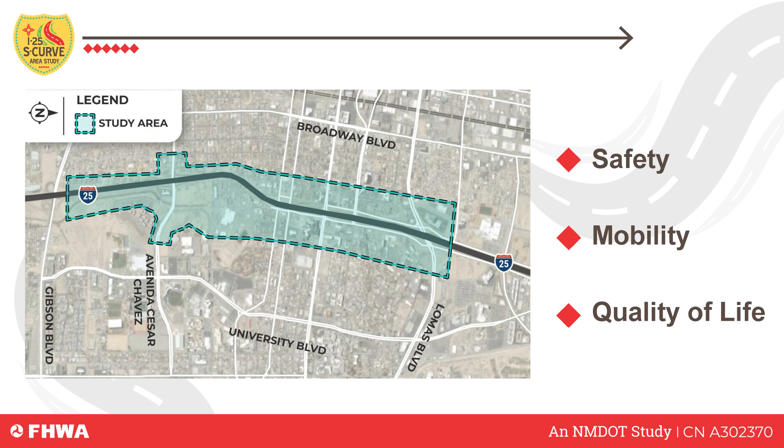We're going to start by going over the welcome packet that you received when you first arrived today. Then the team will review the no-build and build alternatives. We'll go over the level 2B screening and the alternatives advancing. Then we'll talk through how to leave a public comment and open it up to questions.

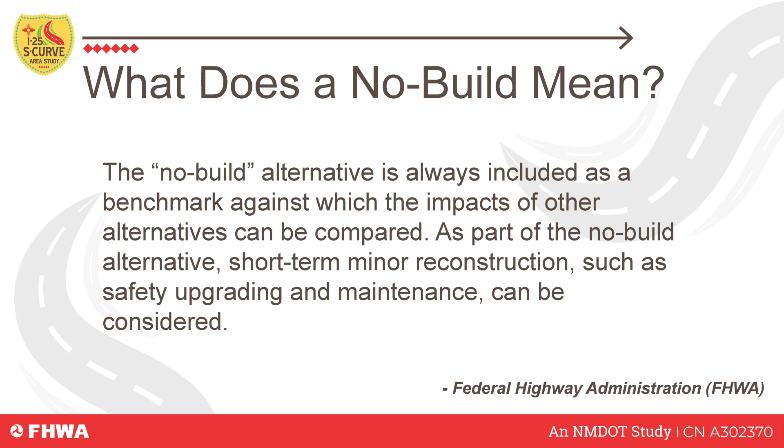So let's try to define what no build ultimately means, because no build is not exactly completely nothing. But what it does not include is new facilities and new configurations. It doesn't include new biking and walking facilities, and it wouldn't include any noise abatement features like noise walls.

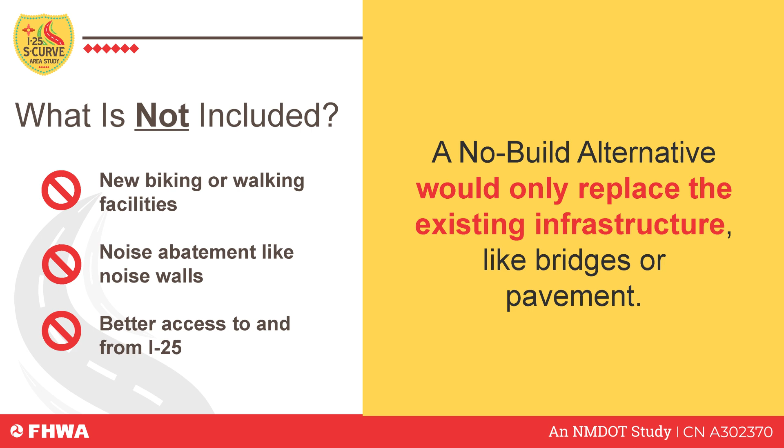And it would not include any changes or improvement to the access to and from the freeway. The no-build alternative would only replace existing infrastructure as it would need replacing, such as the bridges and pavement as it gets aged and needs replacement.

No-build would not necessarily mean there would not be any construction on the freeway. It would require ongoing maintenance, of course. And as the aging infrastructure needs replacement, many of the bridges are nearing that point, so they would need to be replaced, but in similar configurations as today. Construction impacts would be present as those replacements occur. So it isn't like there's no construction, ongoing maintenance, or improvements needed to keep the facilities working.

As with any replacement of existing bridges or infrastructure, or any of the build alternatives, the department does not have any funding identified for this at this time. So the timing of any of those replacements, with a no build or any of the other alternatives, is not known.

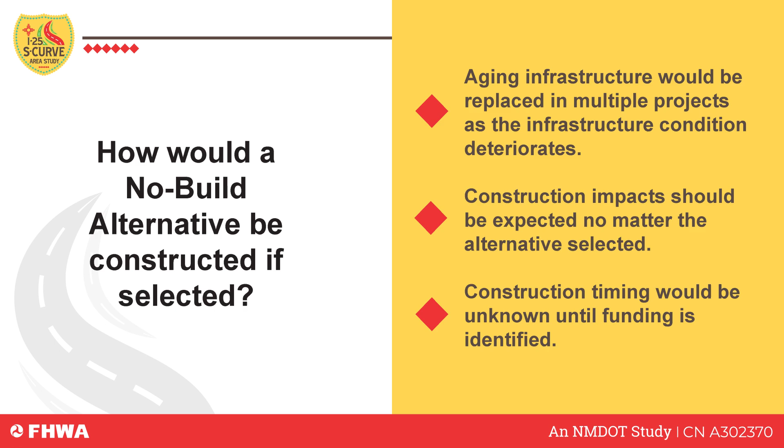Based on a lot of the public input, we did a substantial analysis on the no build and what that would mean over time. If nothing is done to change the configuration of the freeway and the ramps, we do expect to see substantial increases in travel times to and from destinations.

We expect to see substantial increases in commute times along I-25, and a substantial increase in crashes as a consequence of the no build. As that congestion increases on the freeway, we'd also expect the local city road network to be affected, as motorists find alternative routes around the congestion, so we'd see congestion increasing on local streets as well.

This next slide is very similar to a number of boards out in this corner of the lobby, just outside the doors. This is just one representative example. We analyzed travel times using our traffic operations model, and projected traffic out to year 2050 using the MRCOG's travel demand model, then analyzed how that would operate.

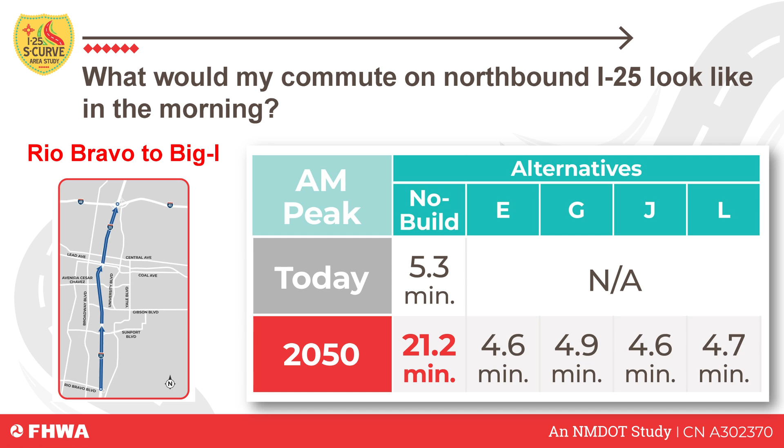Then we also analyzed safety. We performed a predictive safety analysis following a methodology driven by the American Association of State Highway and Transportation Officials, which provides a methodology for predicting the number of crashes. Today, typically what we're seeing through the study area is about 173 crashes a year.

If nothing is done, no improvements are made to the facilities, we would expect that to increase to about 296 crashes per year for the same section. So crashes would increase. This next slide shows what the different levels of improvement would be under each of the build alternatives we analyzed.

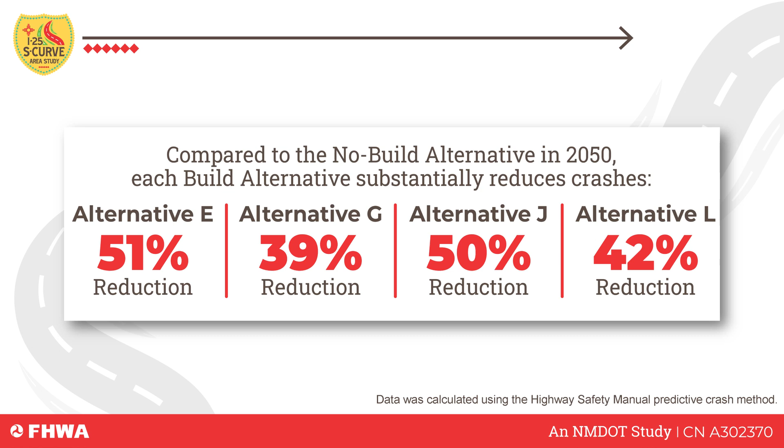We see those range—in the case of alternative E, a 51% reduction from the no build in year 2050. Alternative G, about a 39% reduction in crashes in the year 2050. Alternative J, about a 50% reduction, and alternative L, about a 42% reduction in crashes at that same year. So through that, we concluded that the no build does not meet the purpose and need as we've developed and defined it.

If you participated in previous meetings, we spent quite a lot of time presenting what we saw as the purpose and need for improvements—namely improving safety by reducing crashes, and improving traffic operations to meet the growing and future travel demand. From that analysis and the results presented out in the lobby, we determined that the no build really does not meet that purpose and need.

So the build alternatives, I'm going to spend a bit of time describing these, and it is very hard to describe these and have you see them from the screen. There are boards just right outside that door going along the back of this wall that show each of the alternatives that we evaluated and analyzed. They are E, G, J, and L. Of those four alternatives, we're proposing to forward only two that are much larger scale, laid out horizontal on the tables out there. They're a lot easier to see, so I invite you to do that because it's going to be a little bit hard to describe from here.

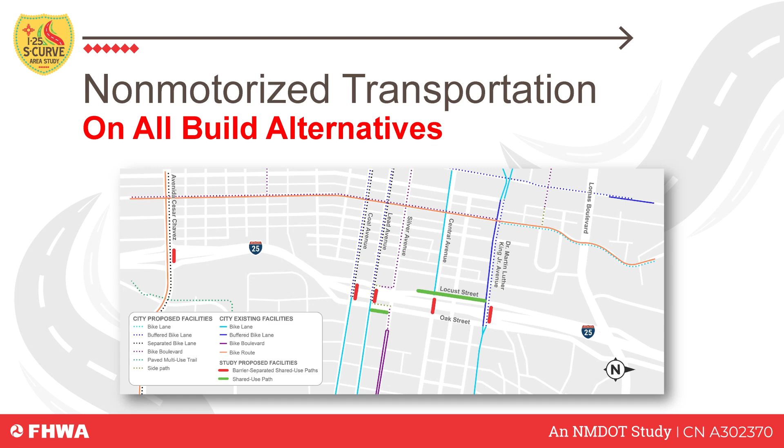In addition, there is a real need for improvement. We found that the safety experience for both bicyclists and pedestrians shows a higher than typical bicycle crash experience, and also a higher vehicle-pedestrian crash experience than is seen normally on similar facilities. Not that that's ever a good thing, but there's an even higher level of that along each one of these cross streets at the intersections with the frontage roads. So there is a need there.

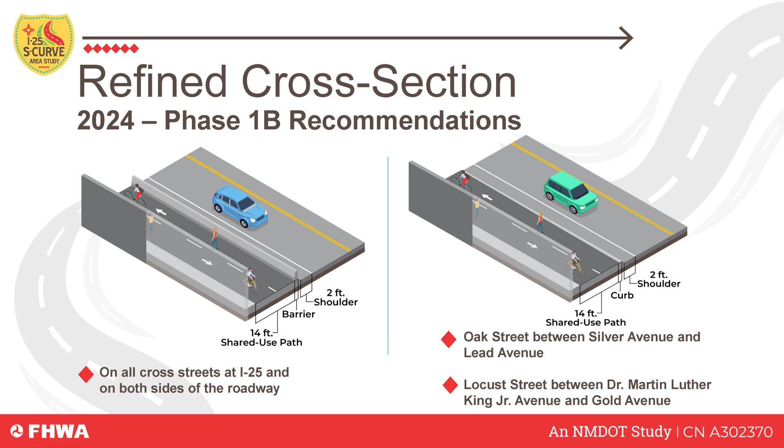At each one of these cross streets, in these alternatives, we're proposing to include a separated pathway that combines both pedestrians and bicyclists on each side of the road, 14 feet wide, separated by a concrete wall barrier from the vehicular traffic on each side of each cross street. That would be carried through the corridor and then connected, matching the cross-sectional elements contained in the city's non-motorized transportation plan, matching those back in once we get away from the freeway. So that's included with each of the build alternatives: a 14-foot wide trail on either side. A lot of that has come from our interaction over the last few years with advocacy groups in the bicycle and trail community in Albuquerque.

Then there are going to be a number of details. We're proposing to include a number of ways for how those sections would transition back to those adopted planned facilities along those roadways. That's going to be a combination of crosswalks and what's called bike boxes—if you're not familiar with them, they're a special treatment where bicycles get an isolated place away from the traffic to make their decisions and crossings—and widened paths through the intersections. So each one of the build alternatives contains those improvements.

For the freeway infrastructure, the ramps and the mainline freeway, there were two options that we forwarded and combined into these alternatives. One is a westerly shift, which shifts the freeway section to the west in the Lead and Coal area, and then an easterly shift, which shifts the freeway to the east, near the Albuquerque Public Schools property where the mural is located.

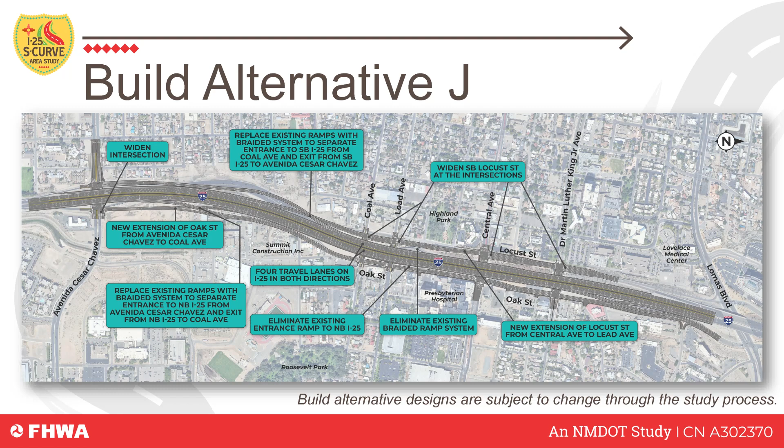The other option is similar to what was forwarded in the last planning study from 2016. It includes a simplification of the ramps, primarily a closure and removal of the ramp southbound from Coal, so you would not be able to access southbound I-25 from Coal. If you were going to access southbound I-25, you would do it through the ramp that exists in the current configuration south of Central. Other than that, it maintains all the other ramps.

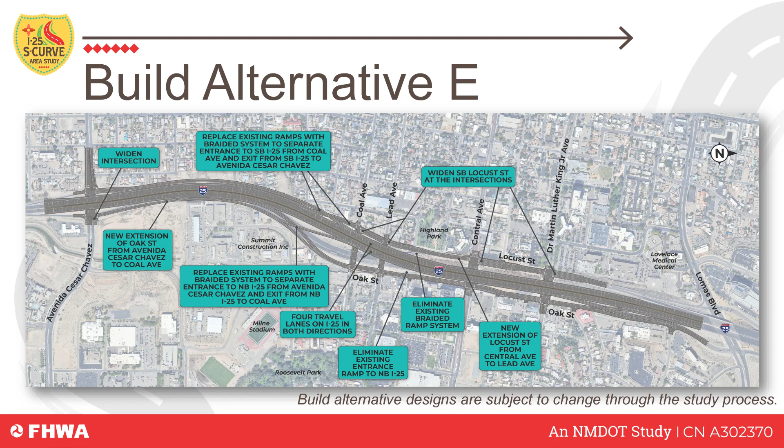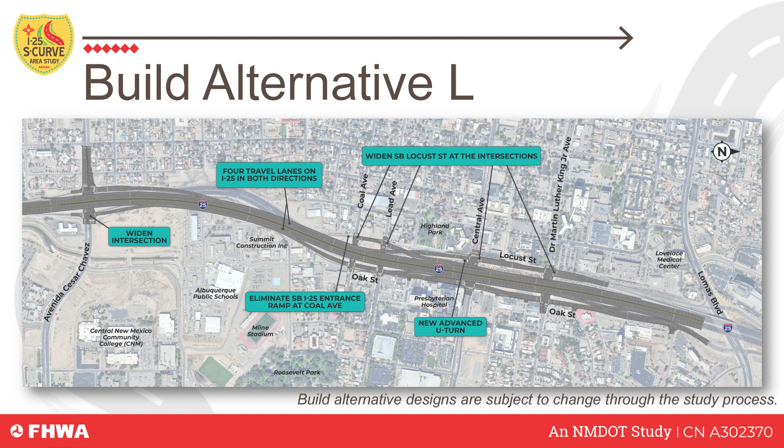It does include the addition of an advanced U-turn, what most people think of as a Texas turnaround, at Central, so you can access that southbound on-ramp south of Central. So those are four permutations: a westerly shift with one configuration and with the other ramp configuration, then an easterly shift with one configuration and another with the other ramp configuration. That's a lot easier to describe standing at the boards, so forgive me, it's a bit complicated to describe from the screen.

And with that, I turn it over to Nicole.

Thanks, Mike. During this phase we conducted level 2B screening. There are three parts to this screening, but the first I want to talk through is purpose and need, which Mike talked about earlier. The information for our purpose and need screening is located at Station 2, if you'd like to see more detailed information there. To evaluate the effectiveness of each alternative, we assessed how well it addressed the purpose and need.

We conducted detailed safety and traffic analysis to determine if an alternative reduced crashes and average delays, maintained appropriate speeds, decreased travel times, replaced aging infrastructure, and enhanced non-motorized transportation options. In the end, we wanted to know: does the alternative sufficiently address the purpose and need?

We used similar scoring to the last public meeting, a 5-point scale ranging from best, with two green check marks, to worst, with two red X's. The results of our analysis: the no-build alternative did not meet the purpose and need, but it will be carried forward as a benchmark against which the impacts of the other build alternatives can be compared. All four build alternatives did meet the purpose and need, as they all substantially reduced crashes and improved traffic operations.

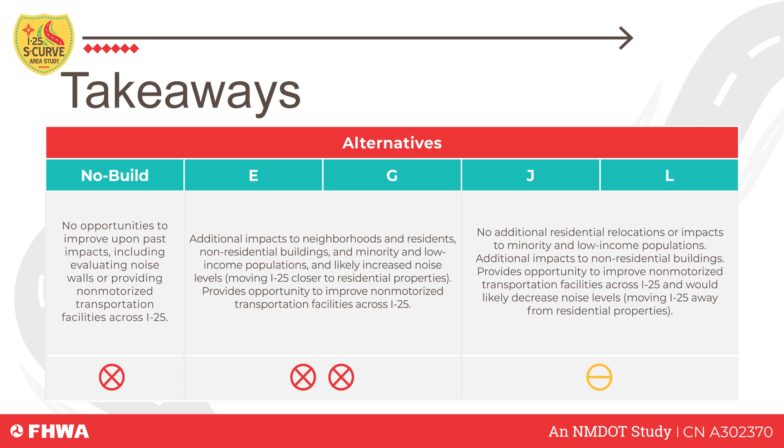Based on this analysis, the study team has identified alternatives that will be moved forward for further analysis. As a reminder, we're following the National Environmental Policy Act, or NEPA, which requires agencies to demonstrate and document that we ultimately identified an alternative that best avoids and minimizes environmental impacts while meeting the transportation needs.

So alternatives J and L will move forward for further analysis because they best met the purpose and need while minimizing impacts to environmental resources. As we shared earlier, the no-build alternative will also be carried forward as a benchmark to compare against the build alternatives.

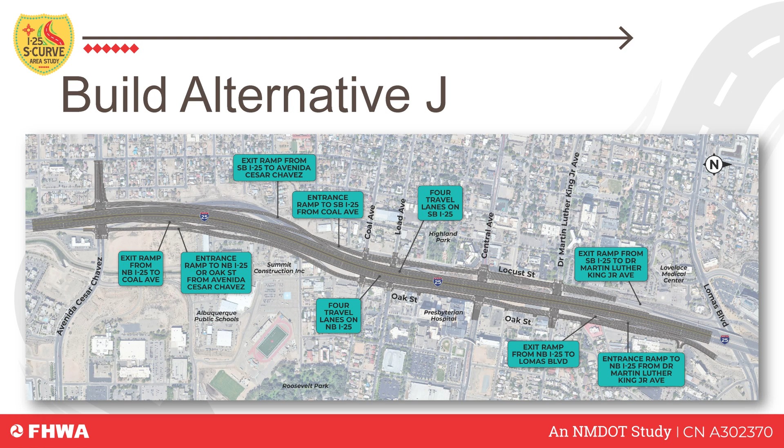As a reminder, alternative J is an east shift alignment alternative. On the screen here, you can see we're labeling some of the ramp locations and key features in the study area. This alternative does have the most impacts to commercial businesses on the east side.

In summary, build alternative J meets the purpose and need while minimizing impacts to environmental and community resources. It would not include any residential relocations. It has the lowest number of impacts to historic buildings and Section 4(f) properties, has minimal impacts to neighborhood blocks with underserved communities, but it does have the highest number of non-residential relocations.

Similarly, alternative L also shifts to the east, but it is less impactful to the APS property and other businesses. This is the alternative that includes the advanced U-turn at Central Avenue.

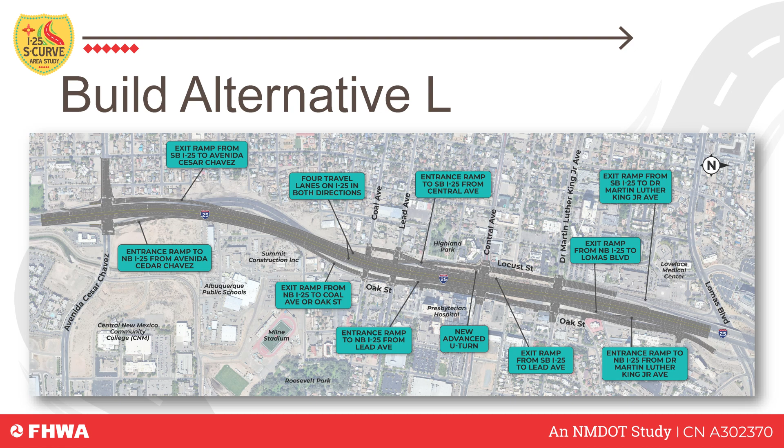Alternative L also meets the purpose and need while minimizing impacts to environmental and community resources. It would not include any residential relocations. It has the lowest number of impacts to historic buildings and Section 4(f) properties, and has minimal impacts to neighborhood blocks with underserved communities, some minor strip acquisitions. It differs from alternative J in that alternative L impacts fewer non-residential properties on the east side of I-25.

So what comes next? We need your input today and over the next month. NMDOT is still evaluating all the data, but once a decision is reached, the study team will identify a preferred alternative based on public input and the data analysis and finalize the alternatives analysis study.

From there, the team will prepare an environmental study that will ultimately be reviewed by state and federal agencies, and we anticipate that environmental document being finalized by late 2025.